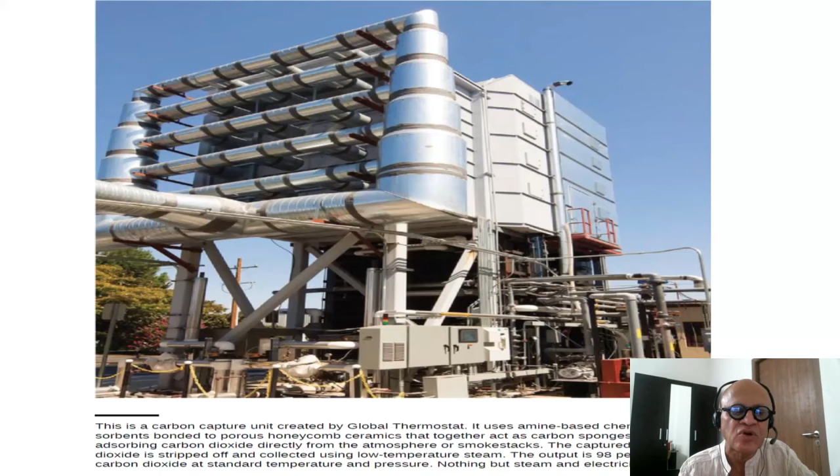So it is pronounced as amine. In the UK they would say amine. It's a compound that is a chemical sorbent bonded to porous honeycomb ceramics that together act as carbon sponges. Basically you want air to flow through and rest of the air to get out, but carbon to precipitate out. It has to be done efficiently, adsorbing carbon dioxide directly from the atmosphere or from smokestacks. The captured carbon dioxide is stripped off and collected using low temperature steam. The output is 98% pure carbon dioxide at standard temperature and pressure. Nothing but steam and electricity is required.

This is another one, Climeworks' first commercial direct air capture plant based in Hinwil, Switzerland. The fans draw in the air where the CO2 in that air reacts with chemicals that selectively bind it.

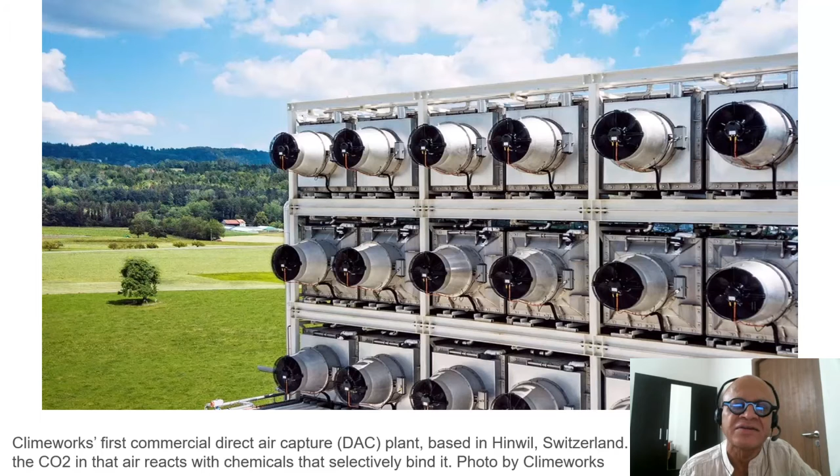Well, I think you can imagine what the problem is. The concentration of carbon dioxide in the air is 0.04%. So you can imagine how many gigatons of air has to be cycled through to capture a sufficient amount of CO2, plus that CO2 then has to be washed out and stored or transported or used elsewhere, which is going to cost, let's say, some amount like $100 per ton, whereas already CO2 may be available much more cheaply for various uses, which could be at $10 a ton.

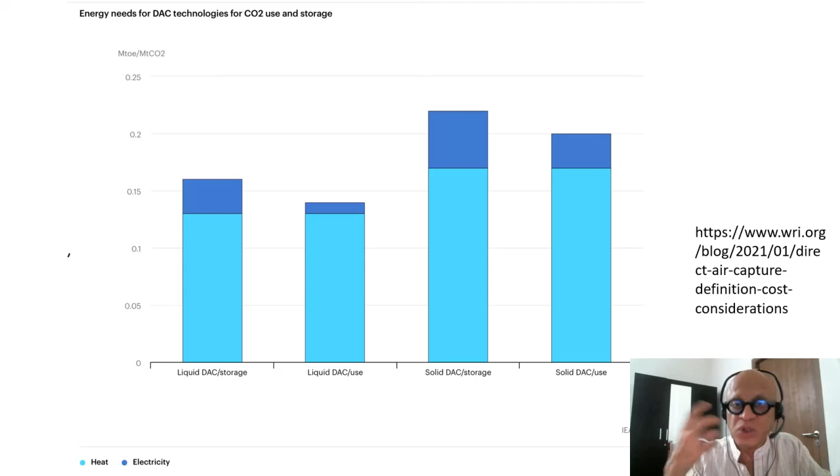So you not only have to account for the energy used to capture the air and to recycle the sorbent material - the sponge, the honeycomb, whatever - can be recycled and reused, and overall it's able to capture enough carbon, unlike corn ethanol for example. If you do a life cycle analysis on growing corn, converting it into ethanol, and then doing the transport etc., the additional carbon it saves is really, really tiny.

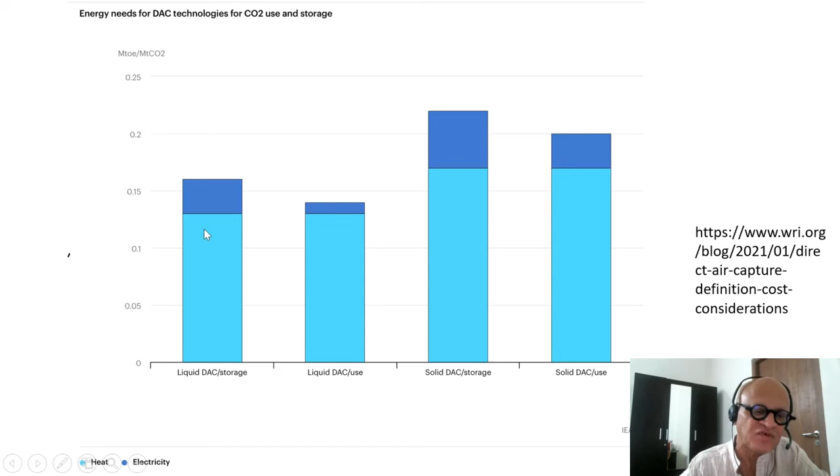So this also applies to direct air capture. Energy needs for DAC technologies for CO2 use and storage in terms of heat or electricity: liquid DAC storage, liquid DAC use, solid DAC storage, and solid DAC use. You can see that the requirements in terms of million tons of oil equivalent versus million ton of CO2 is a significant fraction. Of course, it depends on how well scaled it is going to be by the time we are doing really large scale direct air capture.

Just to give an example of the uses of carbon dioxide: there are direct uses for food and carbonated drinks, and enhanced oil recovery, where CO2 is pumped into oil wells to push out oil that's not easily drilled out. And then there are chemical and biological transformations for manufacturing synfuels or synthetic fuels, which are kind of the intermediate to designer fuels, plus manufacturing of chemicals and materials like polymers and plastics, organic chemistry, and minerals.

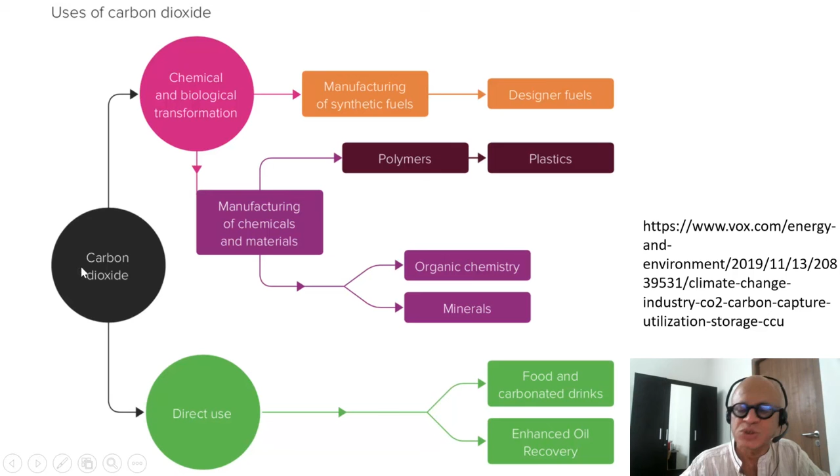Again, the question is how much is going to be captured and at what price it's going to be available compared to other sources that are already doing this for a while.

From the World Resources Institute, the status of leading DAC companies and system types: locations in Switzerland, United States and Canada, using solid sorbent and liquid solvent. Thermal energy needs: 80 to 120 degrees centigrade, 80 to 100 degrees centigrade, and 900 degrees centigrade. The thermal energy source is non-fossil - geothermal, waste heat, etc. So the thermal energy needed to accomplish this DAC is non-fossil, which is a good way to start in terms of reducing the overall carbon footprint of the DAC itself.

Energy resource agnostic - right now it can depend either on renewables or fossil fuels, and this is natural gas with CCS, so it's using a fossil fuel source, but it's doing carbon capture and sequestration, so it's a bit more complicated system.

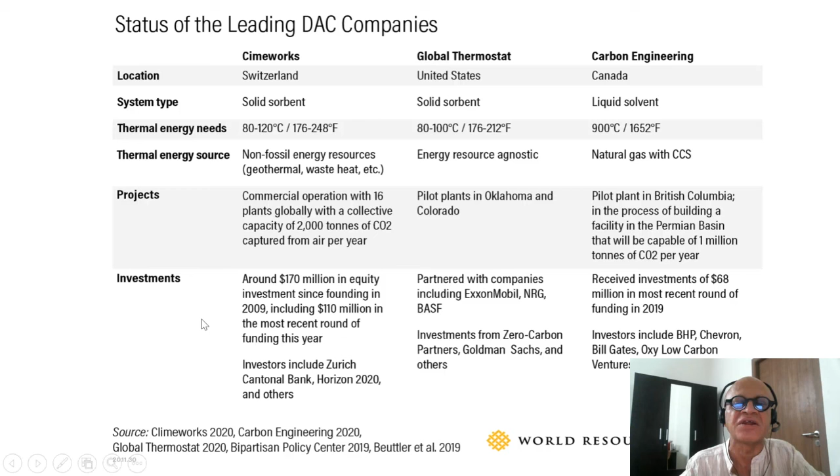So here are the various projects, and this is the investment. Overall, the entire DAC business is suffering from lack of sufficient funding for research, installations, implementations, projects, and so on. So it's going to be a while - that's why it's under coming attractions.

But as I said, looking at where we are headed in terms of carbon emissions right now, including the agreements and commitments made under the nationally determined contributions - I showed a figure in one of the previous podcasts - we see that already by 2020 we should have started drawing down carbon dioxide, which obviously we haven't started yet at scale. So we are on a very high emission trajectory, which has to change really soon if we want to meet the 2 degrees centigrade or 1.5 degrees centigrade warming target by 2100 with 66% probability. If we reduce that probability, we can allow more emissions, but that's just not going to be a good idea anyway.